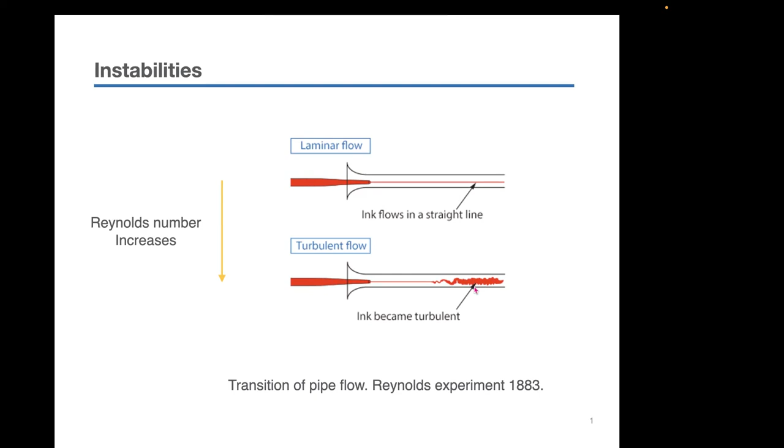So we say that the flow has become unstable, and then we have a transition. So why is studying instabilities so important? Because instabilities are everywhere around us.

Here I report some examples. We can see the Kelvin-Helmholtz clouds that develop when two layers of different densities have different velocities and flow one above the other. Or we can see here the cloud layer in the atmosphere that hits the mountains of Madeira Island, and creates this pattern called the von Karman instability, which is the same that most bluff bodies experience.

And here we also see, for the example of the flow around a circular cylinder, the destabilization of these von Karman vortices that become three-dimensional.

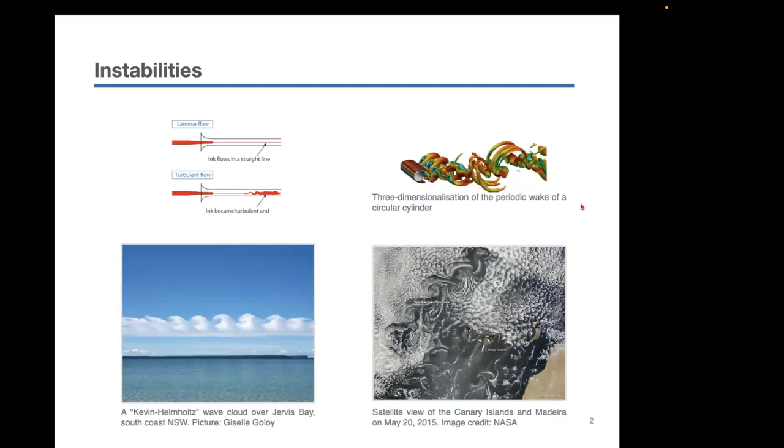And also it's very important to study instability because, especially for applications, we sometimes want to shut down the instability. So we need to study them in order to analyze where they come from, and how we can attenuate these instabilities. There are different methods for analyzing instability.

There are mainly, I have divided them into groups now. The data-driven ones that investigate the stability starting from snapshots of the flow fields, like the proper orthogonal decomposition or the dynamic mode decomposition, or operator-based approaches, like the global stability analysis and the resolvent analysis, which are based on the discrete operator calculated with respect to a fixed point.

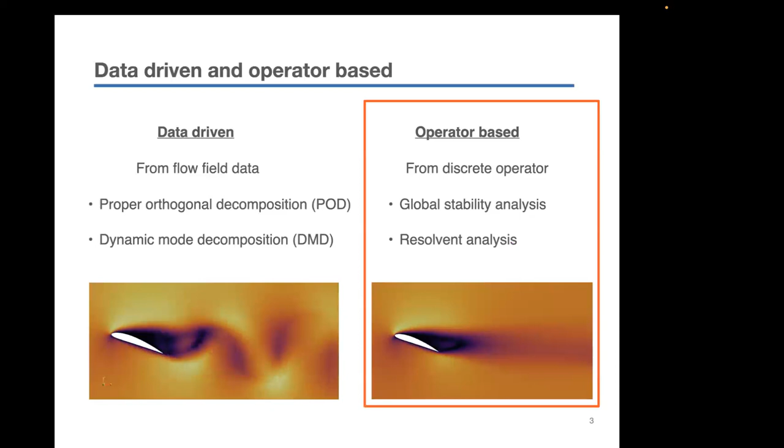Here reported the mean, for example. And in this talk, we will concentrate on this type of approach.

Let me also introduce some concepts of stability that are general for any dynamical system. So we have here a dynamical system. We can find the equilibrium point of the dynamical system, and we can encounter three possible scenarios.

Either the system is stable, so if we perturb, if we move this little ball, it will go back to the equilibrium state, or marginally stable if, let's say, nothing happens, or unstable if we perturb this system, and now this little ball goes far from the equilibrium state.

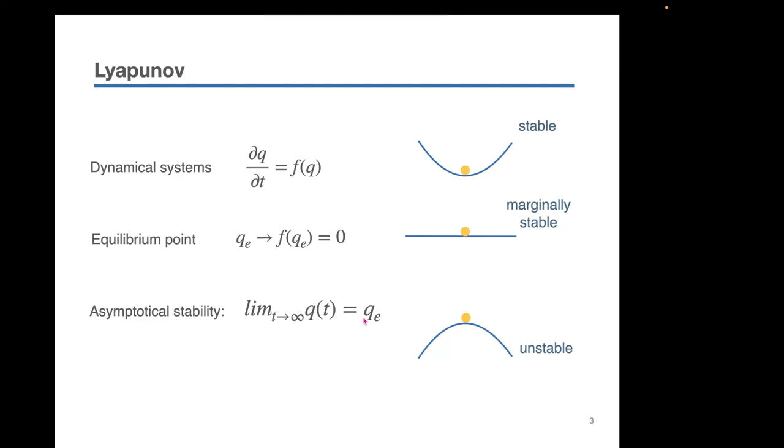And Lyapunov was the first one to mathematically express the first concept of stability, in particular an asymptotical concept. So a dynamical system is asymptotically stable if, as time goes to infinity, the state will go back to the equilibrium state. So how is this seen in the fluid dynamic context?

So here in fluid dynamics, we have the Navier-Stokes system that describes the fluid motion.

So this is our dynamical system. We can create the equilibrium state, which we call the base flow. It could be a mean flow or a steady state. Then we perturb this system, and through a Taylor expansion, neglecting the higher order terms, we are able to derive the dynamic of the perturbation. So in a small neighborhood of a state, the dynamic of the full system is characterized by the dynamic of the linearized system.

Now that we have derived the linear dynamic of the perturbation, we need to find a way to model this perturbation, this Q prime. Actually this depends on the problem that we are investigating. For example, if it's 1D, like the channel flow, or 2-dimensional, like the flow around a circular cylinder, or 3-dimensional, like the flow around a sphere. Let's take the more general case.

So here the perturbation has this form. The spatial evolution depends on the three directions, and this perturbation grows or decays in time with respect to omega. Inserting this form of the perturbation into the dynamical system, we end up with this eigenvalue problem, where omega is a complex number whose real part indicates the growth rate, while its imaginary part indicates the frequency of the perturbation.

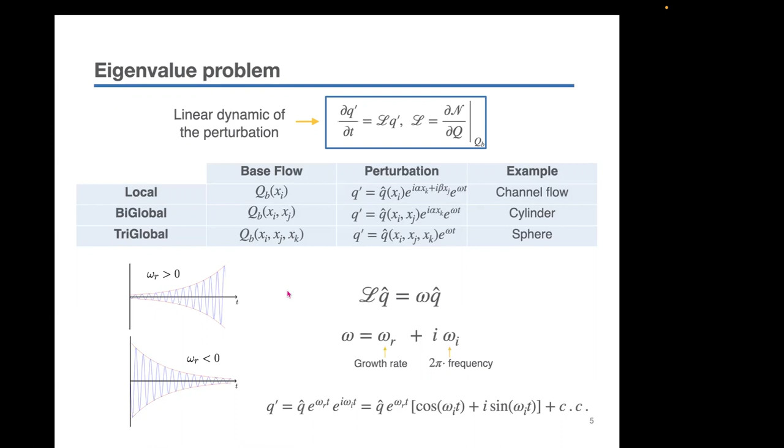But let's see how the linear operator is formed. What is actually the linear operator, and what's the dimension of the linear operator for which we want to calculate the eigenvalues and eigenvectors. So the Navier-Stokes system is composed of 5 equations, and the state vector is composed of 5 terms. So the linear operator comes to be a matrix which is 5n by 5n dimension, where n is the number of cells needed to discretize my problem. This number, this dimension, can be extremely large for certain cases, so it can be very hard to calculate all the eigenvalues and eigenvectors associated with this matrix.

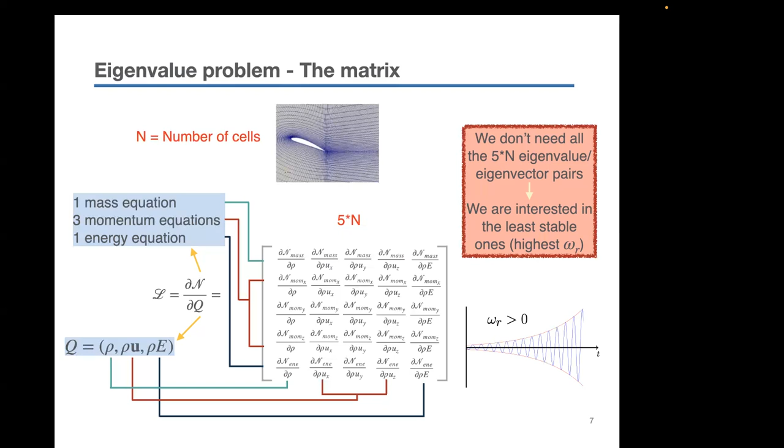But actually we are not interested in all the eigenvalues and eigenvectors, but only those related to the highest growth rate, so those that bring the instability. Let's see some methods to compute these few eigenvalues and eigenvectors associated with the highest growth rate.

So this can be a way to approximate the highest eigenvalue and the eigenvector associated with this highest eigenvalue. However, this computes only one, and especially when we calculate the power iteration, if we only consider the last one, there is a very huge waste of useful information.

So we can actually decide to construct this subspace composed of the sequenced power iteration. Arnoldi's method ends up with this equation where H represents the projection of the original matrix into this subspace. So H is an approximation of my original operator. I can calculate the eigenvalues and eigenvectors of this projection matrix, which has a dimension much smaller than the original problem. These approximate those of my original matrix.

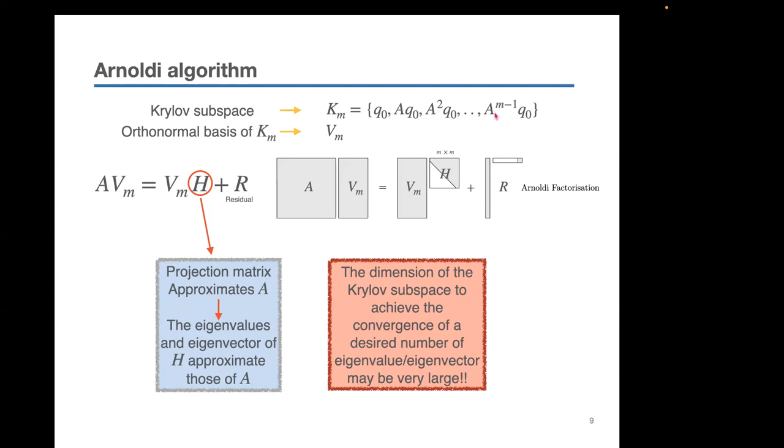So there is an evolution of this method, called the Krylov-Schur method, in which after having computed this factorization, if I haven't reached convergence of the desired number of eigenpairs, I can perform a Schur decomposition of this matrix, which allows me to literally detect the eigenvalues and eigenvectors associated with the lowest convergence or a very low growth rate. We can then remove this part and restart the factorization until I have the desired number converged.

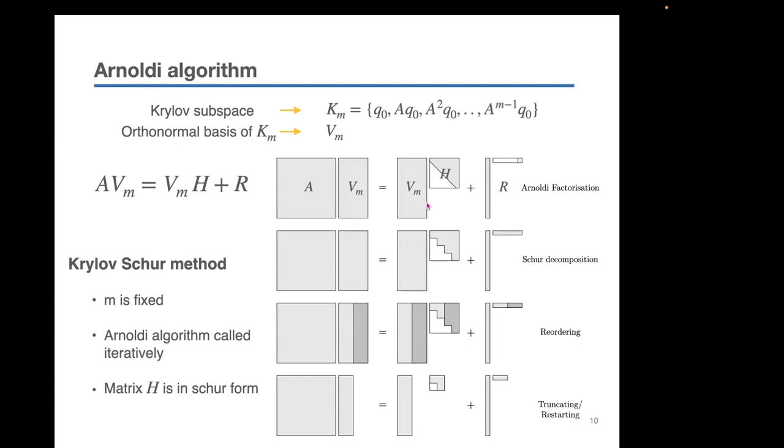So let's see what we do in practice. For this case, for different Reynolds numbers, we can compute the eigenvalues and the eigenvector of the linear operator. And we want to see when the growth rate becomes greater than 0.

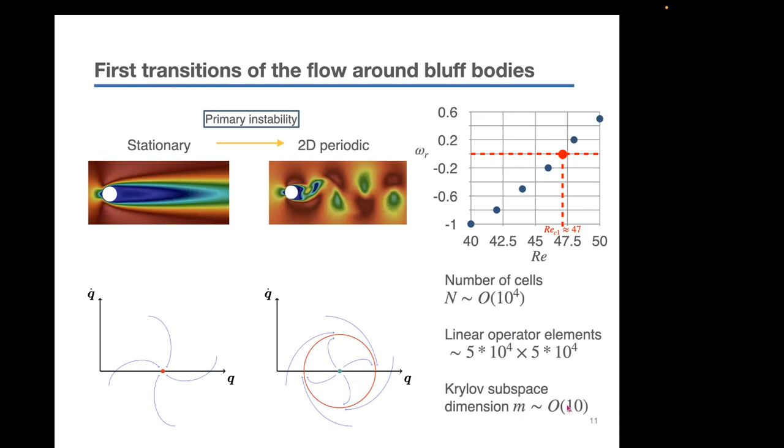And I could use a Krylov subspace of only dimension of the order of 10, which decreased substantially the computational cost of these computations. So now that I found this threshold, we can derive this bifurcation graph.

We can see that here, in correspondence to the critical Reynolds number, we have this fixed point that has become unstable and results in this limit cycle. We can also see that the amplitude of this limit cycle increases.

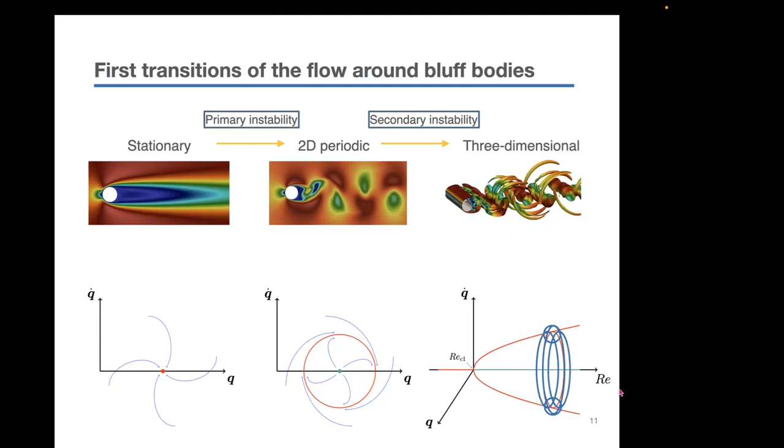And actually, there is another transition, which is called the secondary instability. It corresponds to when this periodic state becomes three-dimensional and can be represented in this bifurcation diagram by a torus.

Let me spend just a few words on how we analyze the stability of a limit cycle, because before I said, okay, we have a base flow, which is a fixed point, while here we have a limit cycle. So actually we can use Floquet theory, which tells us that the stability of the limit cycle can be computed by tracking at each period T the perturbation.

So, due to the periodicity of the base flow, we have that at each cycle, the linear operator is constant. So we are actually transforming the stability of the limit cycle again into a stability of a fixed point. So, but how do we track this instability?

We have to go back a second to the dynamic of the perturbation and derive the evolution in time of this perturbation. We see that the evolution of the perturbation is governed by the exponent of the linear operator multiplied by a certain time t.

If we want to track it at each period t, we only have to substitute the time by the time of the oscillation period. This problem ends up in an eigenvalue problem, slightly different from the one we have seen before, where we have to compute the eigenvalues and the eigenvector with respect to M, which is the propagator matrix, which is instead, in fact, the exponent of the linear operator multiplied by the period t.

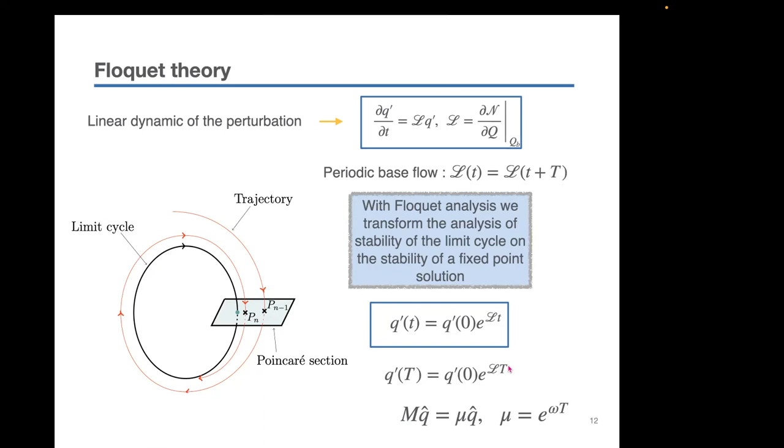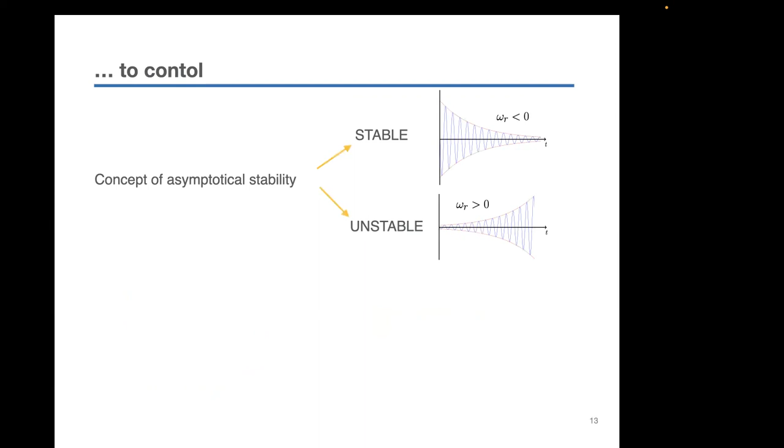So far we have seen this, let's say, binary concept: either the flow is stable or unstable. But actually this analysis does not allow us to answer some questions which are relevant, like where the instability comes from. And is the instability associated to the highest eigenvalue actually the most energetic one, the one most likely to appear?

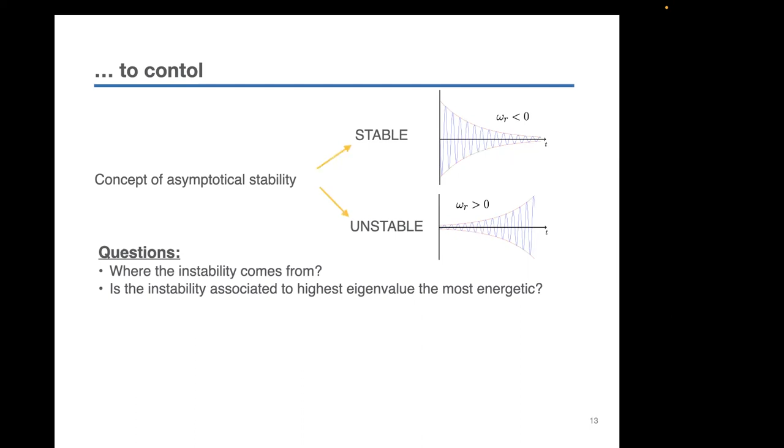And we do want to reply to this question, because actually what happens in reality is that the instability usually does not find its origin where we see its effect. And answering this question opened the door to flow control and to many applications, because, for example, we know that...

Part of, for example, fuel consumption comes from instability developing on the wing of the airplane. So if we are able to answer where this instability comes from, we are able to find ways to shut down the instability before it can grow. So we can reduce the fuel consumption, which brings to a lower evolution of CO2 and reduces also the costs.

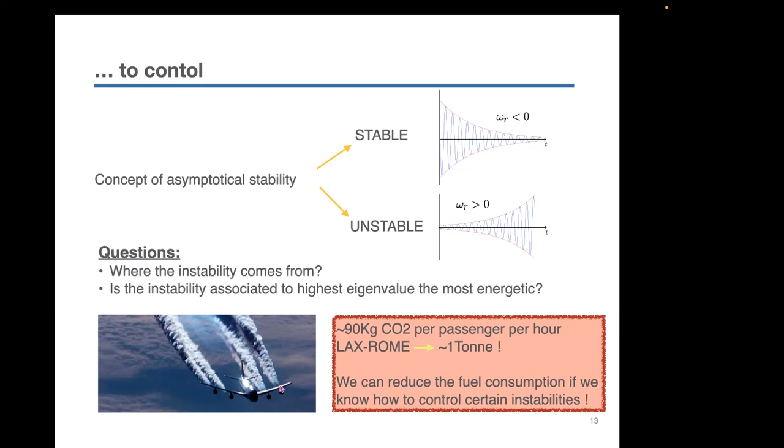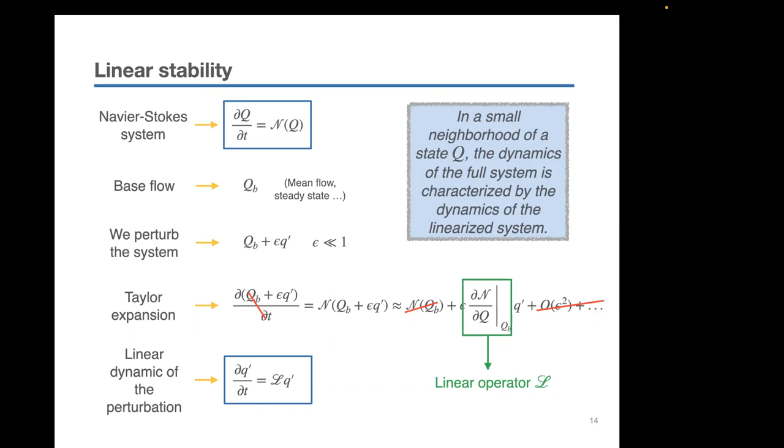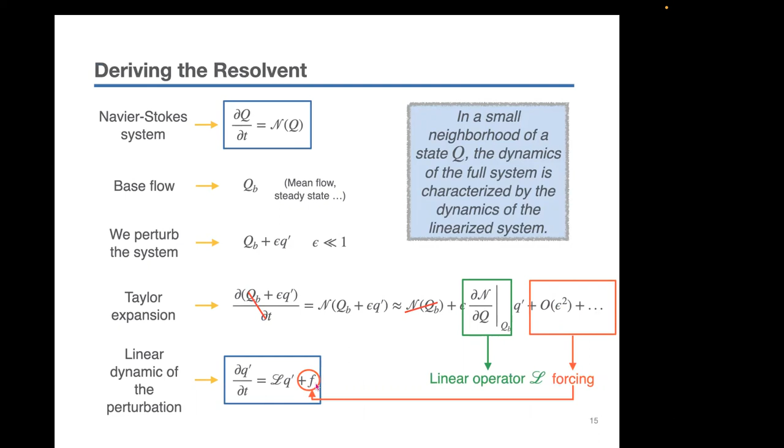First, we have to revisit the way we have derived the dynamic of the perturbation. How do we do so? We previously neglected this term, but now we consider it, inserted in the linear dynamic like a forcing term, which helps us understand where this instability comes from. Modeling the response and the forcing term with this harmonic form, we derive our new operator, called the Resolvent operator.

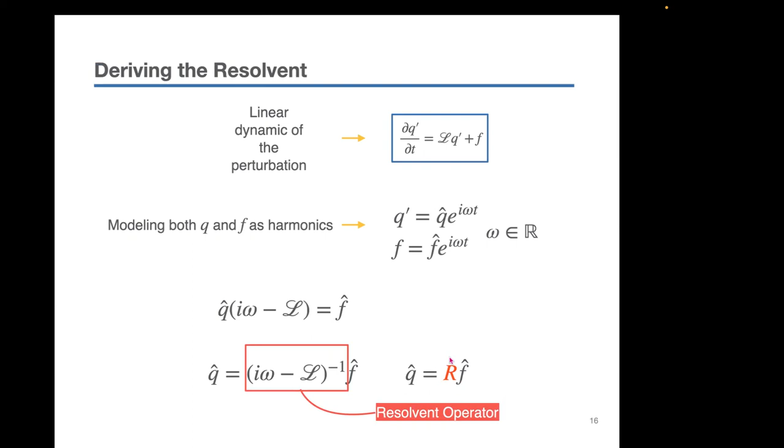And so we have this transfer function. Also, we have to answer the question: is the eigenvector associated to the highest eigenvalue also the most energetic one?

This helps us understand where are the vectors which will suffer much more energetic expansion, and where we will find them. So U is where we will find them, the response, and V is where they come from.

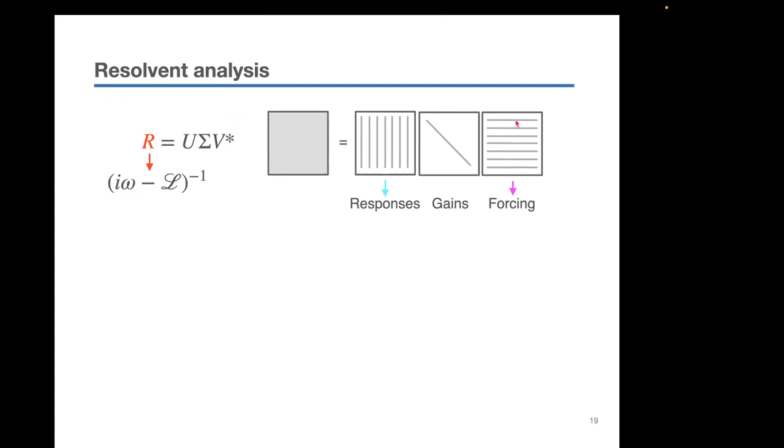So what do you see actually with a Resolvent analysis? Here I report an example from my colleague Jean, a case of an NACA0012 airfoil flow at Reynolds 23,000 and an angle of attack of 9 degrees.

We have to remember that the Resolvent operator is a function of omega that I select. So we can find the evolution of these gains, of this energy, with respect to omega, and find the frequency associated to highest energy, the one related to the instability we want to attenuate or suppress.

We can also see, for example, the response and forcing mode related to the highest gain. We can see the response of this mode, where we see the effects of the instability in the shear layer, and from the forcing, we can see where this instability comes from. This tells us where we have to act in order to suppress or at least mitigate this instability.

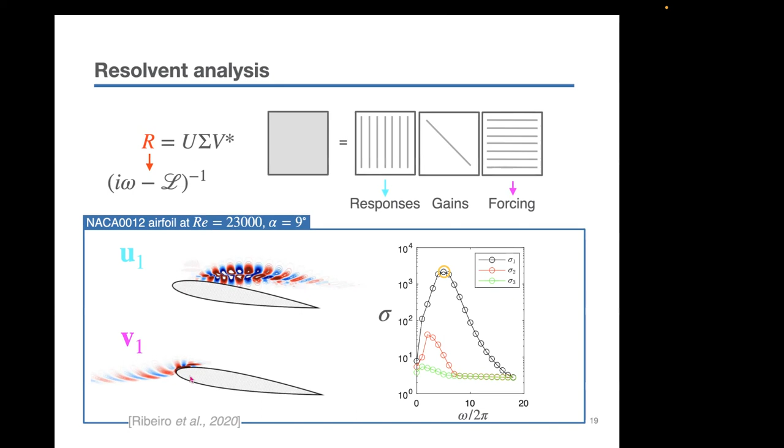there are very small structures that develop in the flow, and in order to capture all the evolution of this flow, we need a very refined mesh, a very refined spatial discretization, which for a turbulent case ends up with a number of degrees of freedom on the order of 10 to the power 8 or 9, resulting in a linear operator, and so a resolvent operator, which are extremely large matrices.

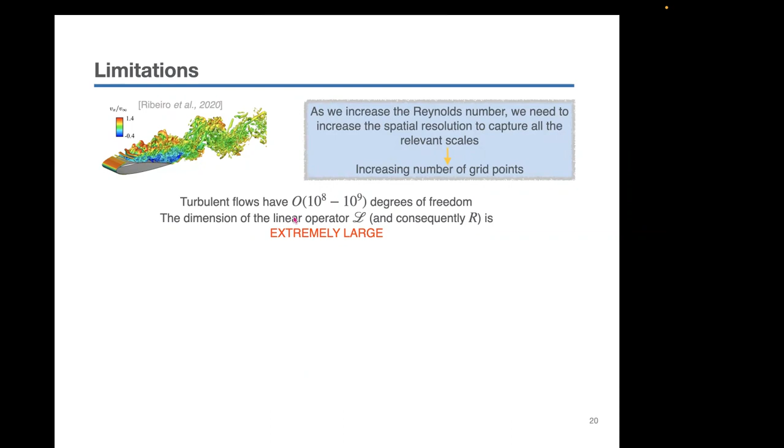Also, we have to understand that we never compute the resolvent explicitly, because we only have access to the linear operator, but we never compute the inverse of this matrix.

Since the singular value decomposition relates to these eigenvalue problems, we can reformulate these problems in terms of the matrix that we know. But in this case, the largest gain for the resolvent matrix corresponds to the lowest gain obtained in this eigenvalue problem, which is harder to find compared to the largest one.

Also, if we want to apply methods such as power iteration or the Krylov subspace method shown before, we have to compute the products between the resolvent and some initial guess, which translates into solving this linear system in terms of the matrix that we actually have.

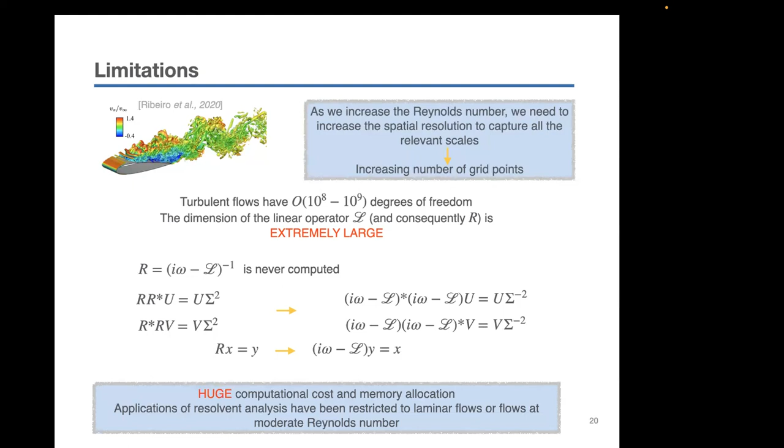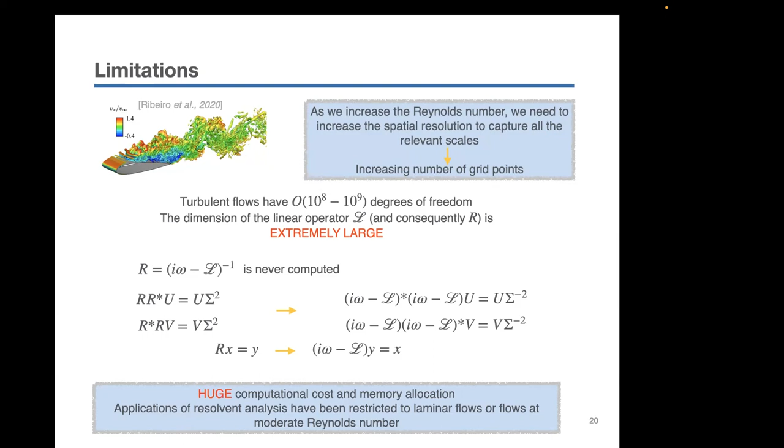So related to the application we would like to apply this analysis to, we have a huge computational cost and memory allocation. That's why applications of the resolvent analysis have been restricted to laminar flows, or at most flows at moderate Reynolds numbers.

However, there are some ways that we are investigating to try to overcome this limitation and to go to a higher Reynolds number.

First of all, I would like to cite the amazing work of my colleague Jean, who performed, through randomized linear algebra, the singular value decomposition of a low rank approximation of the resolvent operator. Or there are methods such as the hierarchical semi-separable methods, where the matrix could be separated into different blocks, and then we could perform a singular value decomposition on each block.

And especially when we change the frequency, when we change omega, we only have to modify the blocks related to the diagonal. Then there are also other methods that exploit the sparsity of the linear operator and compress the matrix into a much less memory demanding matrix.

And also there are other methods such as the time-stepping matrix-free approach, which actually never compute these operators explicitly, but actually just integrate in time either the linearized and the adjoint equations.

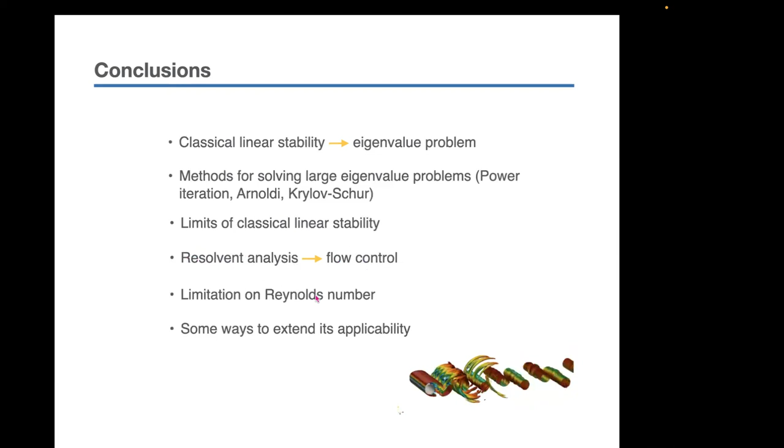And so we have to move to the resolvent analysis to answer this question. However, we are limited so far in terms of Reynolds numbers, but there are some ways that we are investigating to try to overcome these limitations.

So thank you very much for listening, and I'm happy to take any questions.

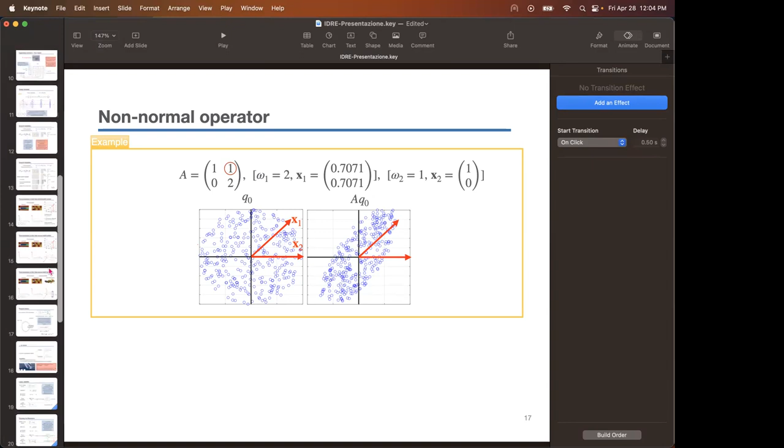Got it. Okay, thanks. Anyone else? If not, let me ask a naive question.

When we use these numerical methods with Taylor expansion, there is a stability within the numerical method, like how much should be the ratio between delta t versus delta x, kind of.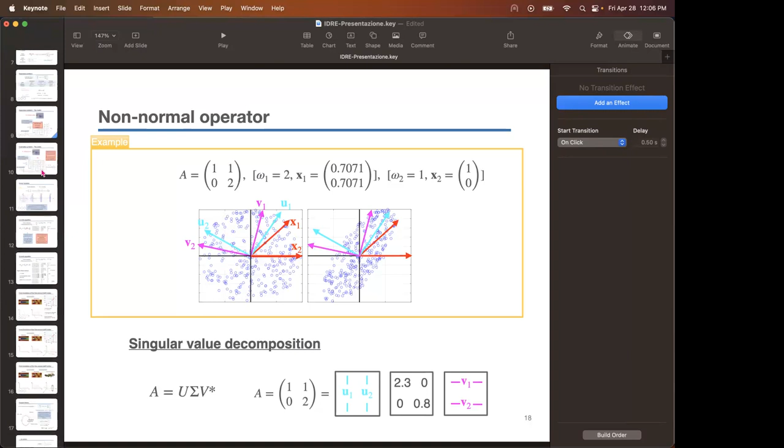Sorry, can you repeat the question? Sorry, so when we use this Taylor series expansion for solving the differential equation, there is a stability. Are you talking about this Taylor expansion? Yes, there is a stability of the numerical scheme itself, which depends on...

Yes, this is mainly for constructing the base flow, with respect to which we calculate the linear operator. This relates to the CFL condition. Yes, the CFL constant. So in the whole analysis, it has been assumed that that condition was already achieved. Thank you.